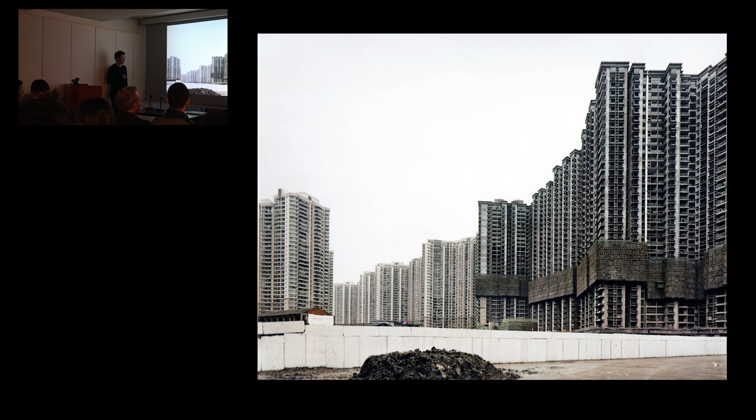So I just gave you a quick background about why I selected 'Seeking the Origin.' That's the origin I'm talking about.

The reason I'm saying this is because I don't believe one generic strategy can cover the whole situation. For us, each project is a unique issue that we have to face. We have to find a unique solution for each project, because our projects are actually scattered around the whole country almost.

But today, because of time limitations, I selected 3 projects which actually reflect, to some certain extent, our thinking about design practice. But they're actually in 3 kinds of locations.

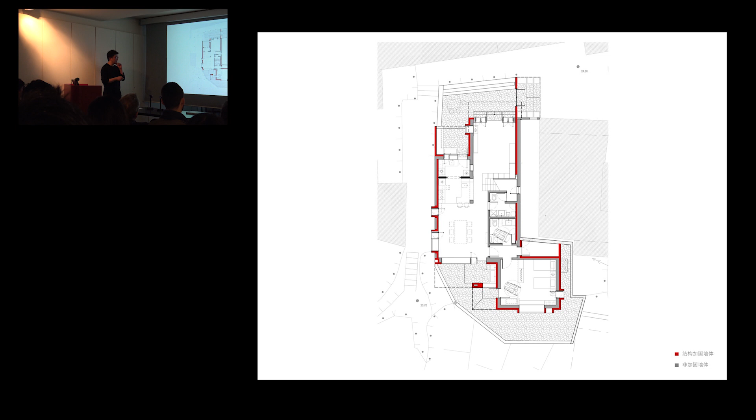We had been talking about different possibilities, but eventually the structural engineer gave me this kind of solution, which I like, because in addition to adding the third floor on top due to the new reinforcement of the structure, we also have some freedom to do more.

For example, because of the new layer of concrete, we can rearrange the layout. That's the existing layout—for me, the problem is that they have a bathroom right in between the living space and the ocean, this direction being the ocean, so it's blocking the light and also blocking the view.

Because of the new structure, we can relocate the bathroom to the corner, which is a back wall of the house shared with the neighbors—there was no much light anyway in that area. So we can open up the view to the East Ocean, and let more air flow into the space, and the light as well.

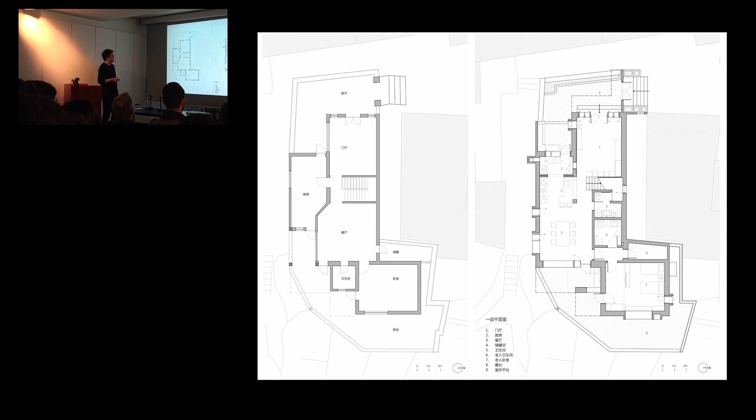Same thing we did for the second floor. This is the original location of the bathroom, and that's the new location of the bathroom. It's all along this back wall, which is to the north.

That's the new addition to the third floor, which I will explain later. They don't have any specific desire about the function of the third floor. They just need a space that can accommodate different kinds of life inside.

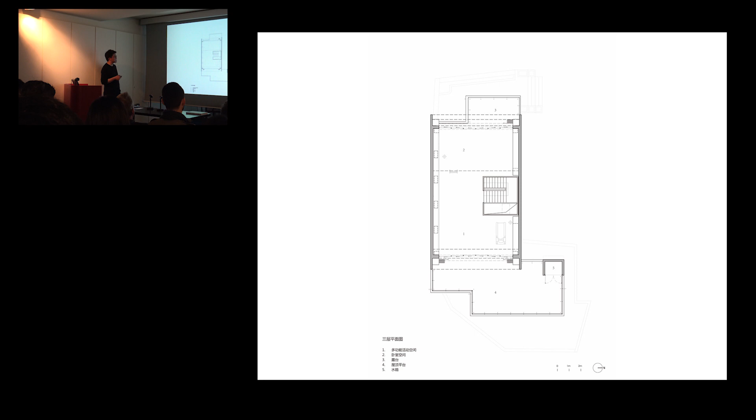As I said, the new structure gives us another freedom to remanipulate the location of the window. Because of the thickness of the combination of brick, this layer is the original brick, and this darker layer is the new concrete. So we have the thickness of the wall.

We actually project the new concrete structure outside the wall by 30 centimeters. The reason we do that is because the captain told me every summer they have hurricanes or typhoons, and when it rains, the water will just flow in all directions on the wall.

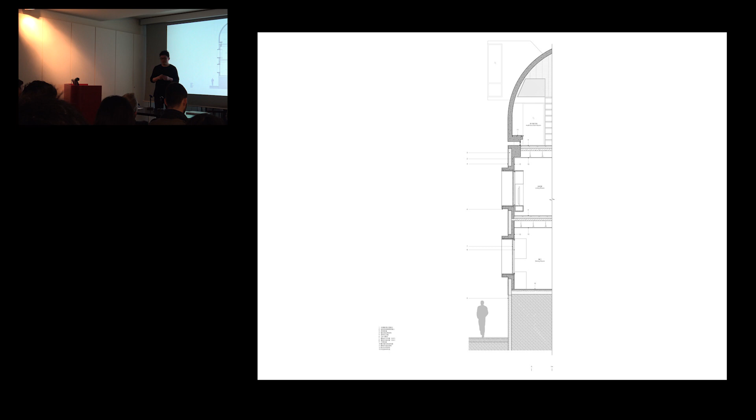That causes a very serious problem of window water leaking. So by projecting this window frame with concrete, we can avoid a large amount of water, lowering the risk of water leaking in the window system. Because of the thickness of the walls and the projection, the windows start becoming a space, not just a thin cut opening on the wall. We actually use the space to design some activity inside it, which I will explain later.

That's a sketch showing the window become a couch, for example. Or the window can extend into the space as a table. That's what we thought during the design process.

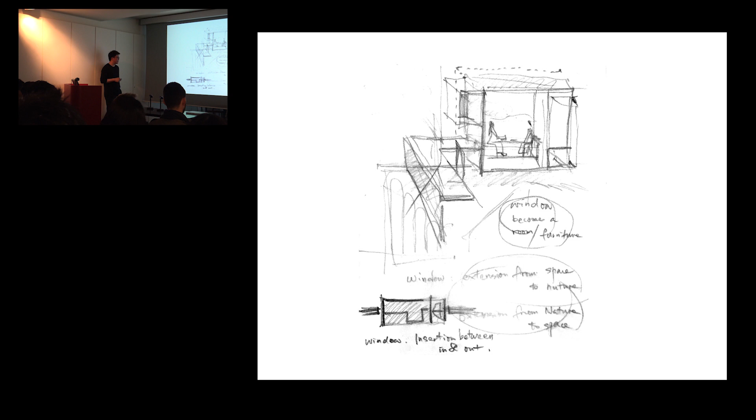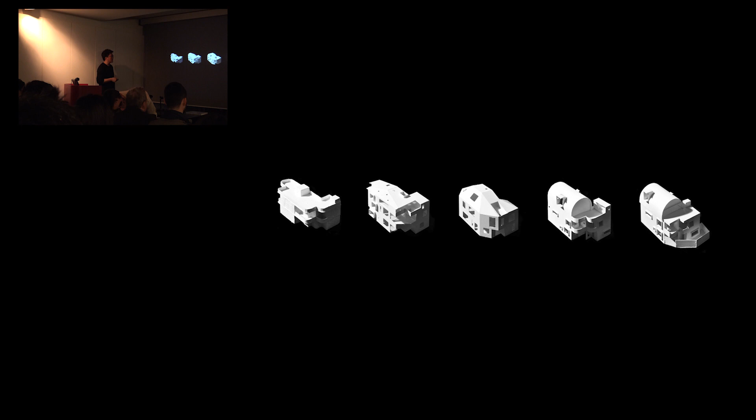Of course, we went through a comparison with different options. Now I'll talk about the third floor, the new addition. We chose the shape of an arch. We have many reasons to do that.

First of all, I think it's the most efficient way to let water run away from the roof, because before, the roof water leaking was pretty serious. If we do an arch, there will be no water staying on the roof, which reduces the risk of water leaking on the roof.

That's the first reason. The second reason is because we did this concrete new reinforcement along these two sides, so this arch seems like a kind of natural outcome. The wall actually grows up and converges at the top.

In addition, the arch has a very clear direction facing east and west. As I explained, on their rooftop, at the third floor level, they can enjoy the ocean view to the east and west. So the arch becomes a connector of these two ocean landscapes, transforming them into human perception.

There's another reason for the arch: their family is religious people, they believe in Christianity, so the arch has a little hidden indication of religion. Those are the reasons we chose the arch as the final design decision.

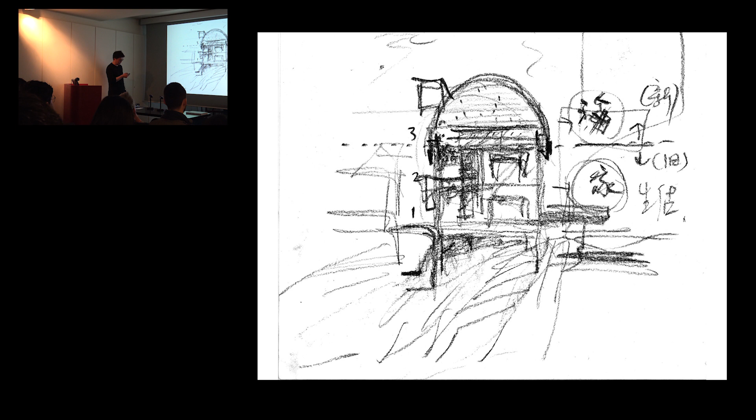That's all the sketches along the process. You can see we really cared about this east-west direction, which the arch connects together.

That's the axonometric drawing.

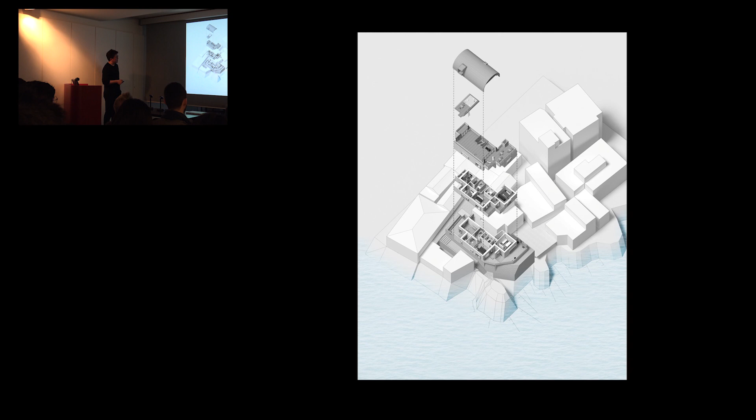Now the construction started. Because they have to put a new layer of concrete, they have to drill holes in the original brick, so these two kinds of structure can hold each other in a stronger way.

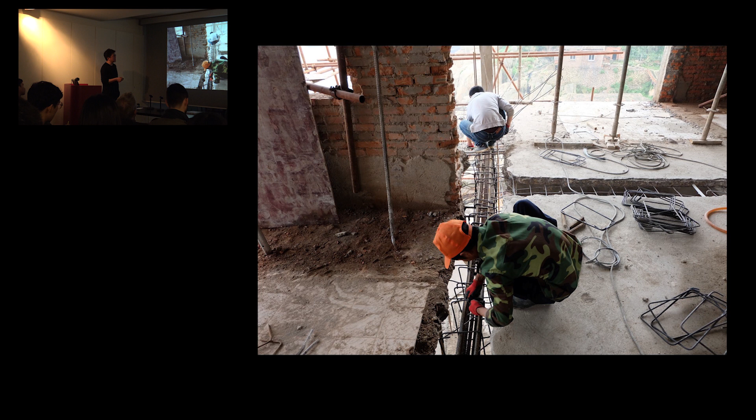They cut the existing slabs in order to put the new beams into it. That's just—it's almost like naked.

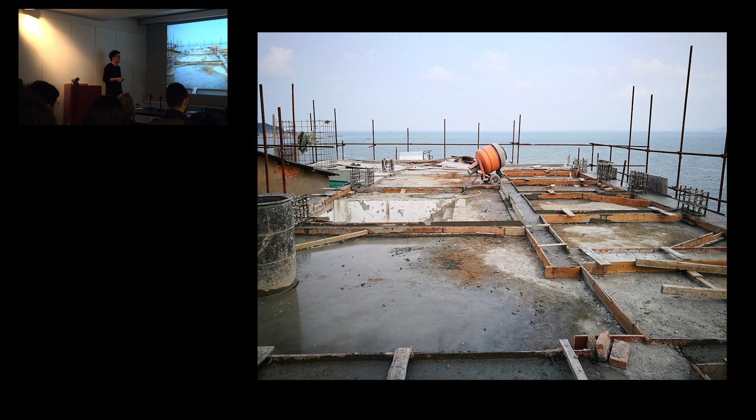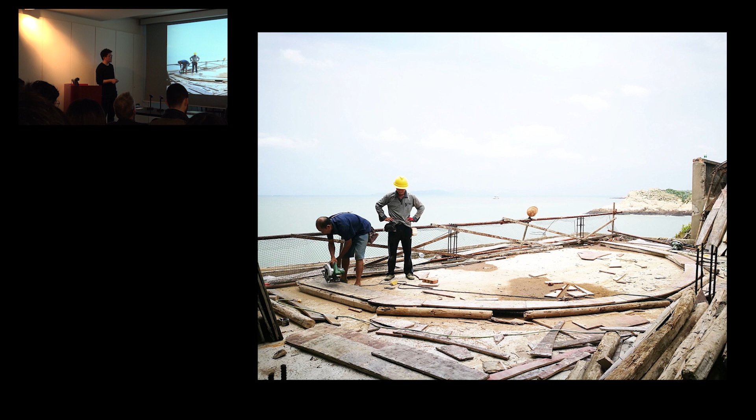That's the guy. That's the first piece erected. The shape starts showing.

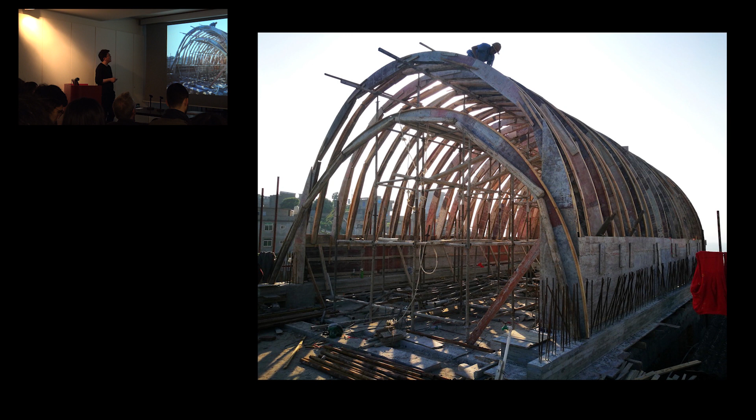Well, it's already beautiful by itself.

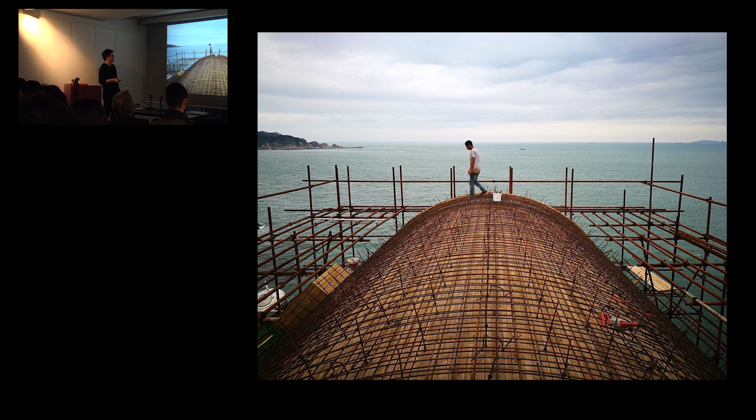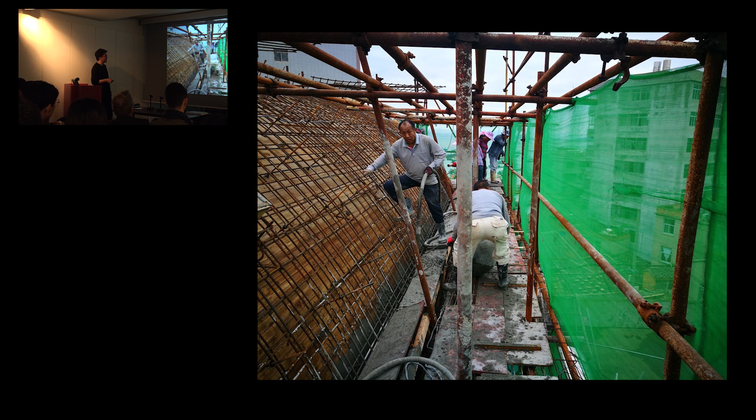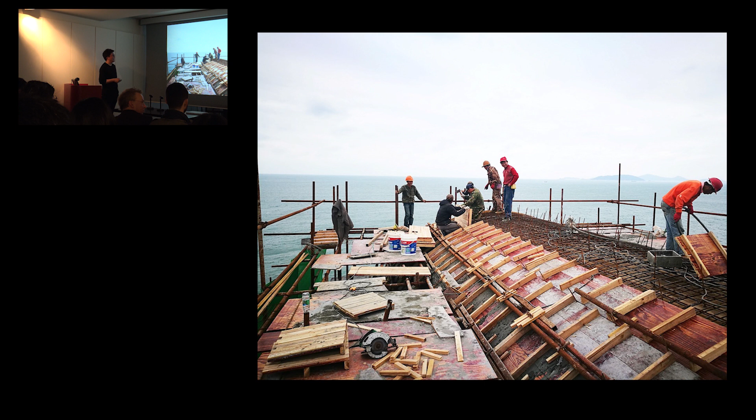That's when they start pouring the concrete. They put the rebars inside the formwork and start pouring the concrete, cast in place. This is really a handmade project because the valley, the alley of the village, is very narrow. No big machine can approach this building, so everything has to be carried by hand. That's when everything is almost finished.

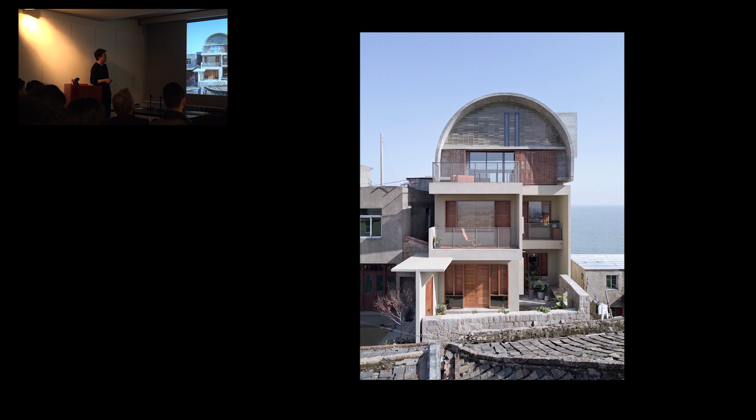That's the building. That's the final outcome of this entire project. The lower two floors were actually just painted with the waterproofing paint in a brownish color, but the top part is concrete.

That's the building in the twilight. At some parts, we actually leave the texture of the old bricks. We didn't really cover them out, we just paint a very thin layer so you can still feel that the old materials still exist there.

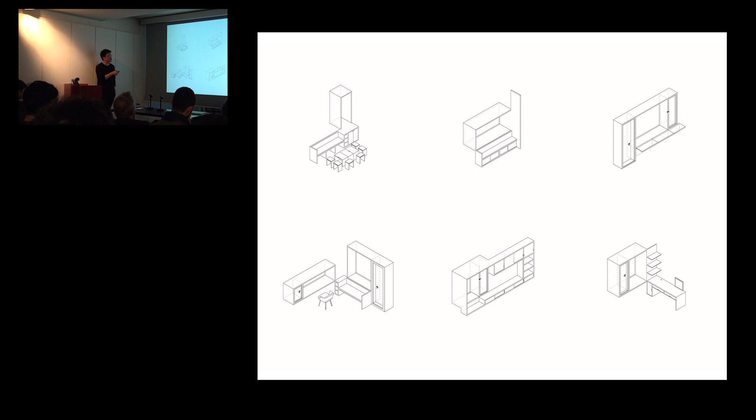Actually, I have a film that can tell you a more complete story. This is the window furniture I was talking about. Each window becomes a furniture piece between the inside space and the outside landscape. So you can see that's the window arrangement.

The operable window is always on the inside of the frame because we want this frame to protect against water from the rain. But the fixed window is on the outside of the window frame to make more interior space. And that's one example of the window, so you can just open it like that.

And that's the window becoming a living room, a television shelf. The window becomes an extension from outside to inside, at the same time from inside to outside. People can actually sit here reading a book. That's a window becoming a couch, a table. That's the daughter's new bedroom.

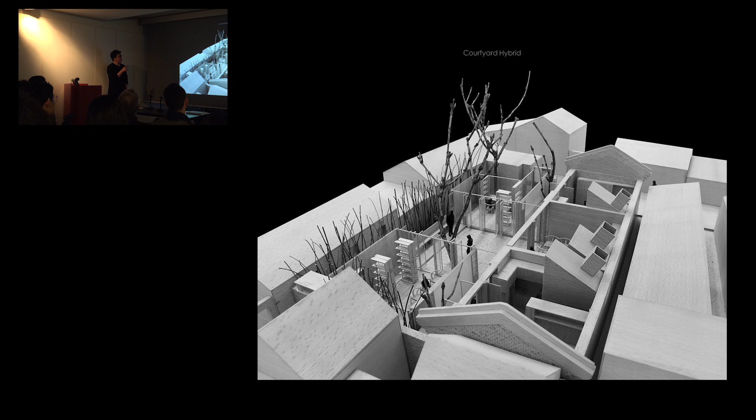Okay, the second project, I have to be faster. This is what we call the courtyard hybrid. It's actually in Beijing Old Town, in the Baitasi area, which is inside the second ring, the center of the city.

You see, this is all courtyard, which is actually the traditional living space of the Beijing people, regular people. This is a map from Qianlong, Qing Dynasty, about almost 300 years ago. You can clearly see the courtyard fabric. Each family has a yard. It's very clear.

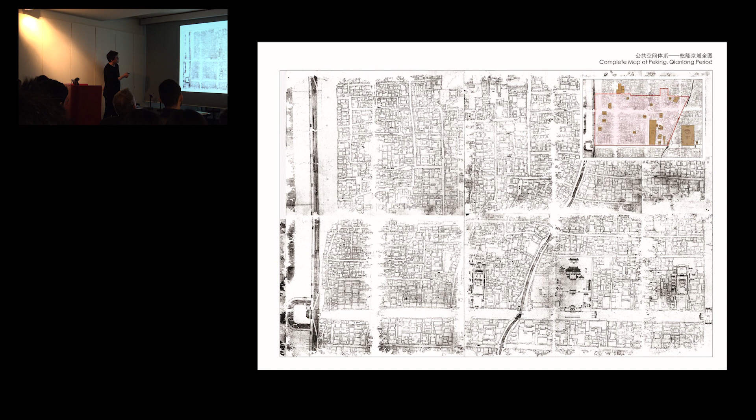But after the 1950s, because more and more people squeezed inside the city, before, one courtyard belonged to one family in most cases. But in the recent 30 or 40 years, most courtyards are shared by multiple families because of the lack of living space.

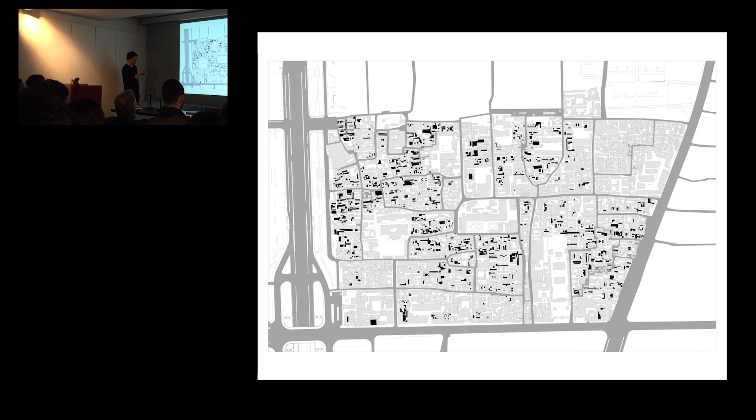The black part is when so many people live in such an insufficient space, they start building their own kitchen, storage room, or even small bedrooms. So the entire urban fabric changed. You won't be able to perceive the clear courtyard fabric as in the last map. All the yards are filled by this new addition of family construction.

The owner, the client of this project, is actually a government background company. What they're trying to do is revitalize this old district in Beijing, because along with this, the courtyard's quality of space is going down. The rich people are moving out because they have money to buy new apartments or move to better areas. So the whole district became like a rental residential compound for lower income people, and they want to bring some new energy into the district.

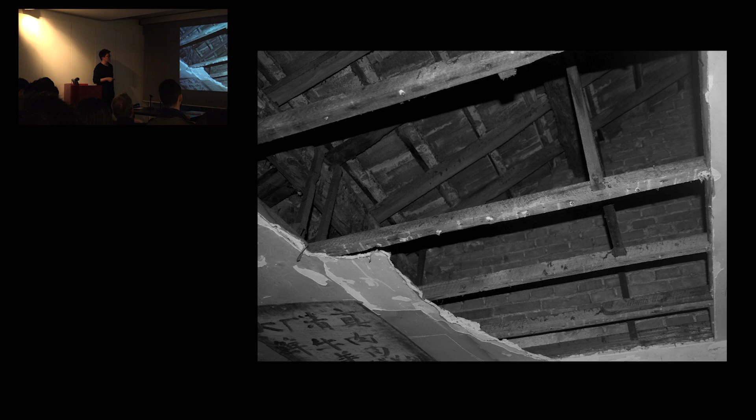The current structure is almost unsafe. And that's the space inside the yard. Comparing with the image I showed you of the original courtyard in Beijing, this has a very big difference in terms of spatial quality. You can imagine living in this narrow space with different families in one yard. So that's even more sad, I think.

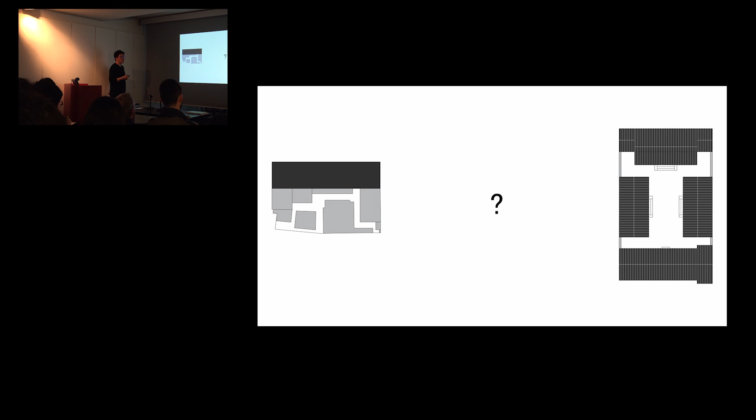So the topic of the design is, between this current condition and the old Beijing courtyard, what we have to do for this renovation of the project. These are some keywords from the beginning of the design.

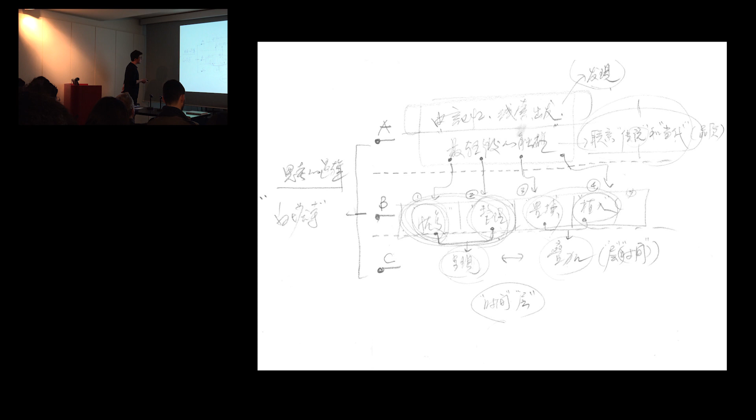Recovering, reorganizing, inserting layers of time, and so on and so forth. That's the keywords that before the design we have to remind ourselves of what we're trying to do in this small space.

In the very beginning, the program is a public library lounge coffee bar. That's the very initial program that the client gave us. So we designed this, keeping the original footprint of the main building, and remanipulated all these different volumes, clusters of small space, to make it a functional space for a library or lounge. This is the first round of the concept.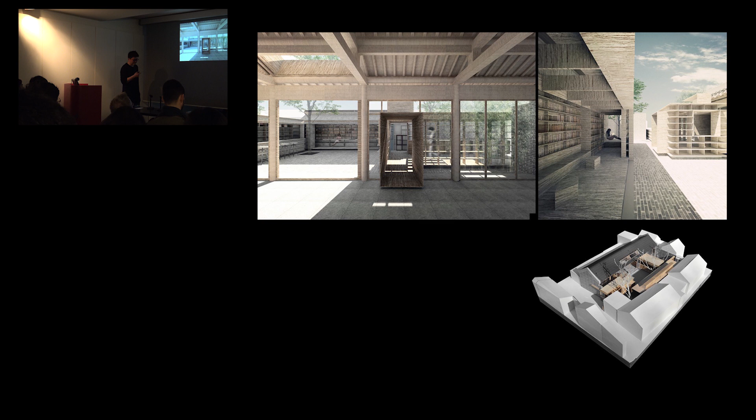But after we had done this, the client told me they changed their mind. They said we don't have enough capability to operate this lounge because that needs professional skill, so we need some space to get quick money. They wanted to add 2 residential studios inside this small yard. That's actually a safer operation because they just rent the space out and get the money back. I said, okay, let's try that.

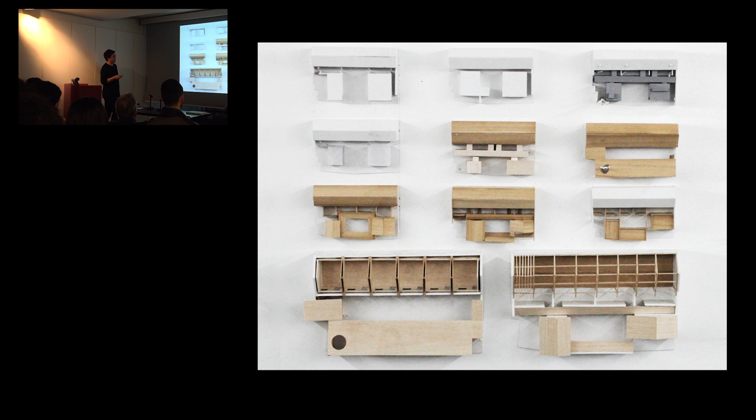But at the same time, the good thing about the client is they still want to keep the yard public. So as you can see from the diagram, these are 2 studios which could be rented out, and in the middle we leave space for a public cafe. We have a yard which belongs to everybody, sharing the yard.

I think what we're trying to do is still keep the concept of using the yard to organize the whole space. So you can see the studio has a small yard, they have their own privacy, but the public yard is shared with everybody.

And this is like a multiple pavilion space. It could be rented as an office, or maybe it could be some event space later on. That's what the client told me.

And I think there's an interesting part of this entire courtyard: this is one hutong, and that's another hutong on this side. So we're trying to keep a connection inside the yard to let people freely penetrate from one side of the hutong to another. I think that's something I personally feel very interested about in this project.

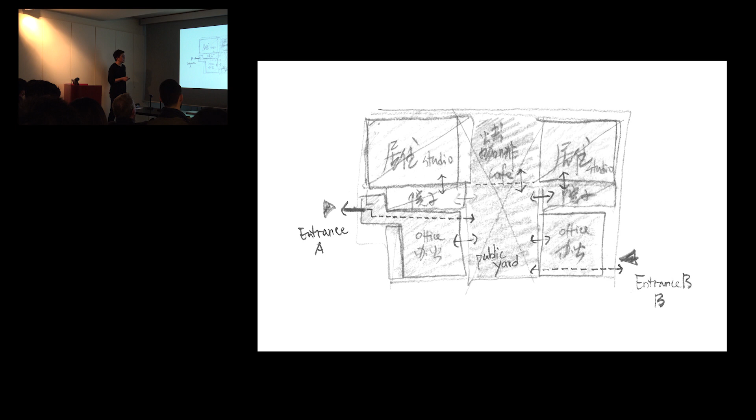So we developed this project. You see 2 studios with small bedrooms and kitchens and their own yard. Of course, this wall is translucent to keep the privacy of the studio, and they have a gate outside their room. Then one public cafe with 2 small spaces on both sides. And this is the connection of the 2 hutongs.

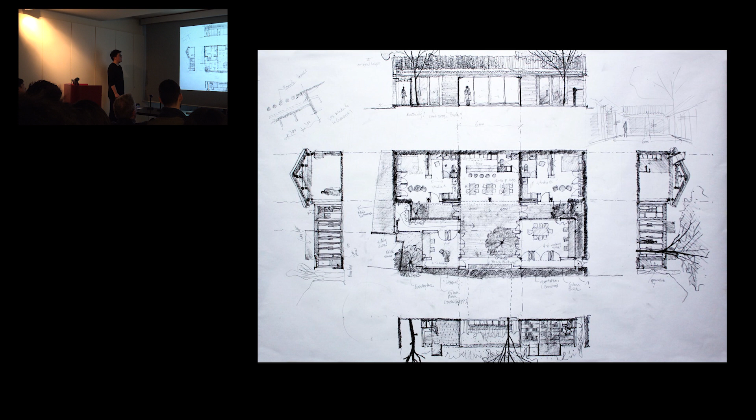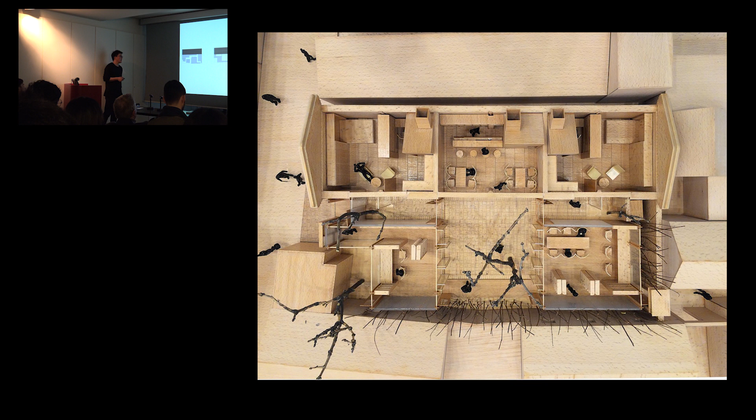And we use some large-scale models to test this kind of arrangement. So what we do is reorganize all these clusters of small boxes to give privacy to each function. At the same time, we keep this original shape of the courtyard as a very clean shape to try to make a peaceful atmosphere inside the yard, which you can see later on in the picture.

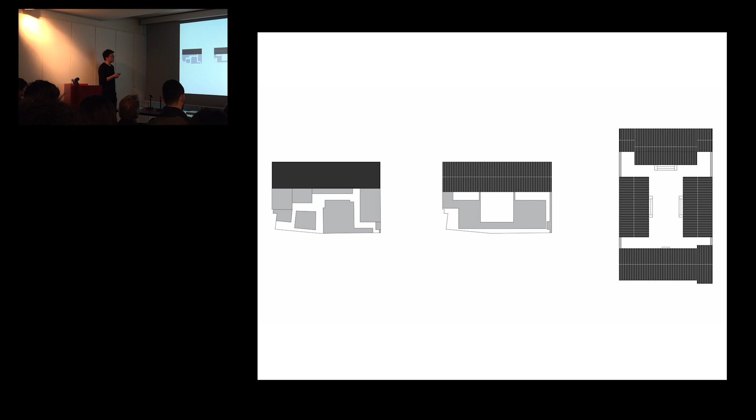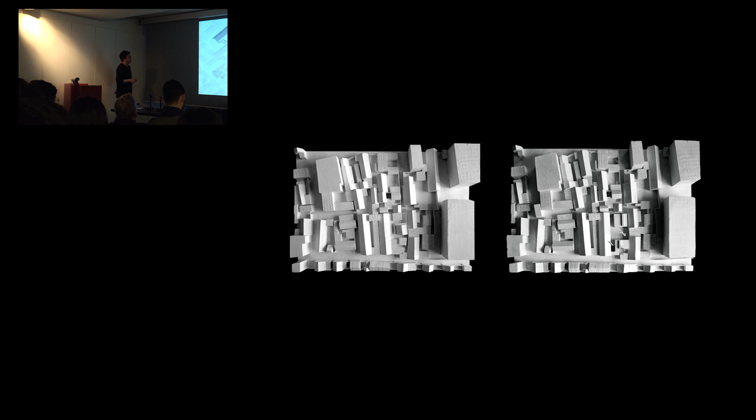So the urban texture is not very much disturbed. This is the old and that's the new. We just reorganize all these small boxes. That's a diagram showing the layers of this concept.

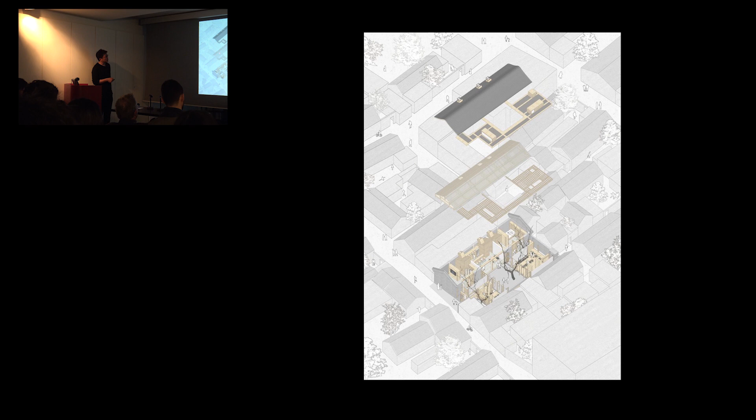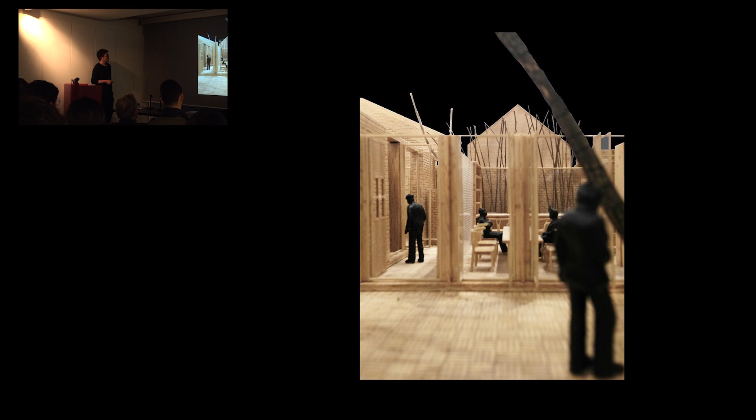That's the space layout, and that's the structure. We have 2 kinds of structures, I will explain later, and that's the roof system. That's the model showing the different kinds of activities and the spatial quality. The scale of the model is large, so we can really see the space, try to imagine what it will look like after construction.

And that's the studio actually for the rental. So we went to the construction document phase. And then one day a client called me, they changed their mind again. They said, well, we calculated, even though we rent that studio out, it's not a big money at all.

So let's get rid of the studios. Let's make it an entirely public space for events, exhibitions, meetings, conferences, whatsoever, to attract more people into this zone and have more interaction between outsiders and local people, which I think, okay, it's okay — architect is always magic, right? So we got rid of these 2 studios to make a more generic big space for multiple functions. But the good thing is everything else is kept.

So you see these 2 pavilions, small yards, big yards. We have a long bench over here, and we leave a small gap with the neighbors to let air and light penetrate into the space. And this hutong and that hutong are connected by the path here.

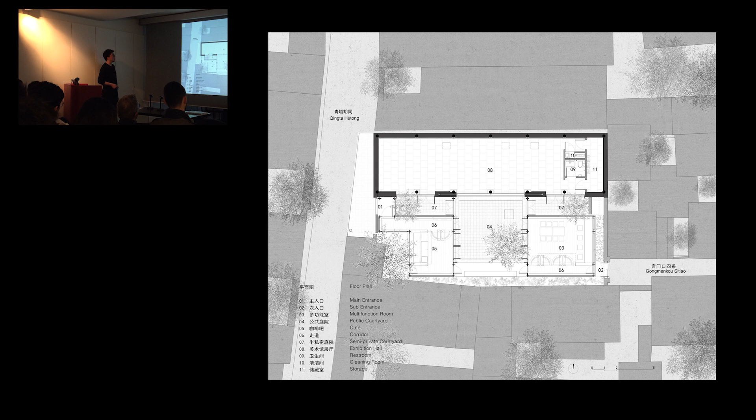And that's the structure model that we did in the process. Basically it's 2 kinds of structure systems. The north building, which is the main building of this courtyard, we have to keep the original structure. That's the law in Beijing.

But for the new addition, we selected prefabricated laminated bamboo as the main structure material. The good thing about this is it can actually be pre-made before the construction, so it can shorten the construction process, partially done in the factory. This is almost like a juxtaposition of these 2 kinds of systems.

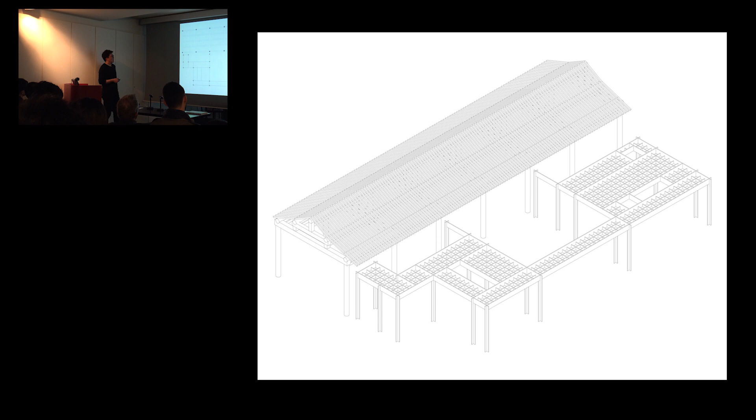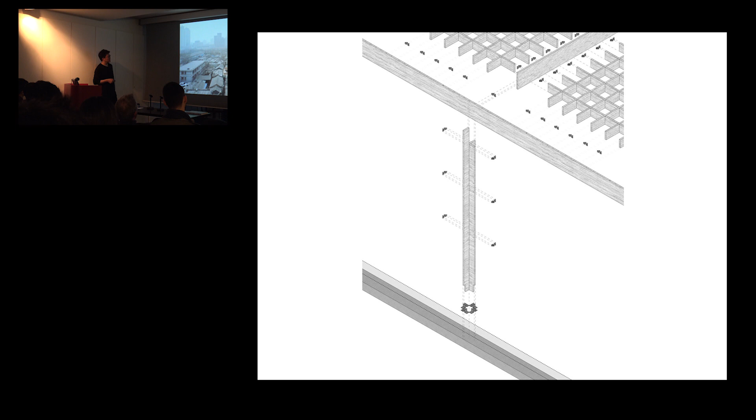That's the relationship in plan between this new structure and the old. That's some details of how we hold this structure together. This is the new addition, the laminated bamboo. Because it always comes as a plate, we had to find the detail to make it like a column, held periodically by these holders. That's after construction.

Just like we add a piece of wood in the yard. Well, this is typical smog weather in Beijing. We almost half of the year always have that air quality. And that's the main yard after construction.

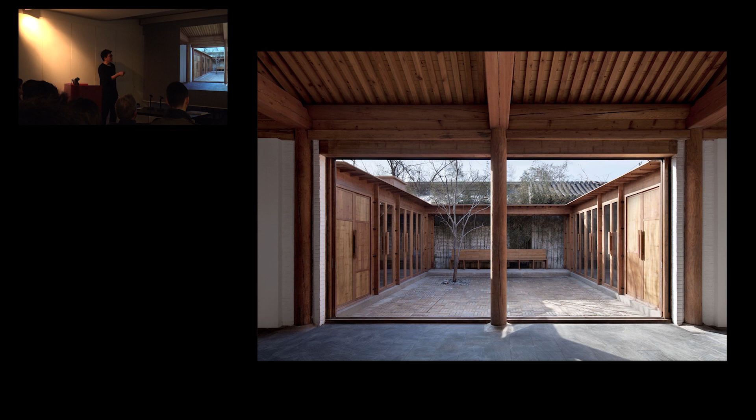So you see this is the old structure, like a traditional structure, and that's the new addition. Different angles of the space. All the surfaces are flexible because we try to think: when the weather allows, when all the surfaces are open, the space becomes more fluent. That's some tectonic details about how this bamboo plate is held together by these small clip holders.

This is a big sliding door. You can slide it all open when the weather allows. That's the main building inside the main building.

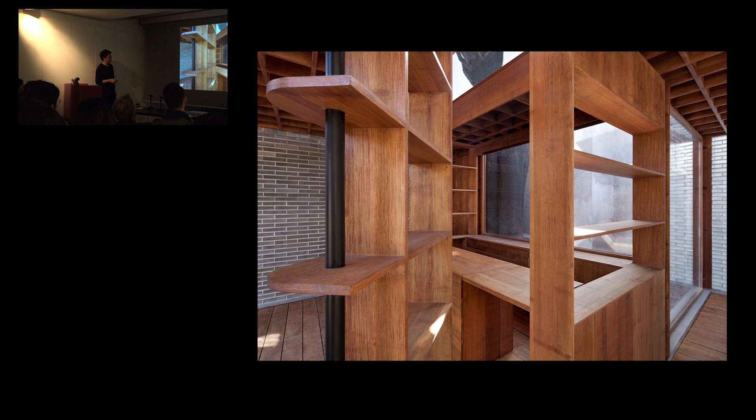Because the space is so tiny, we had to design a series of rotatable furniture to give more flexibility of use. That's one of it. So this rotates to a closed condition. That's another rotatable shelf. That's the bench.

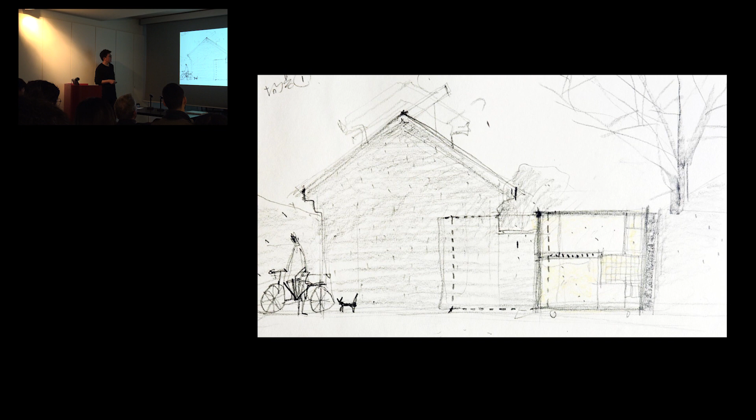Small corridor. That's the main yard and the smaller yard here. And from outside, it's like this. This is the traditional way this kind of Hutong building looks. We give a little touch to this entrance to make it special, but it works well together because the size of the glass brick matches. This is a sliding door at the entrance, making this like a small vestibule.

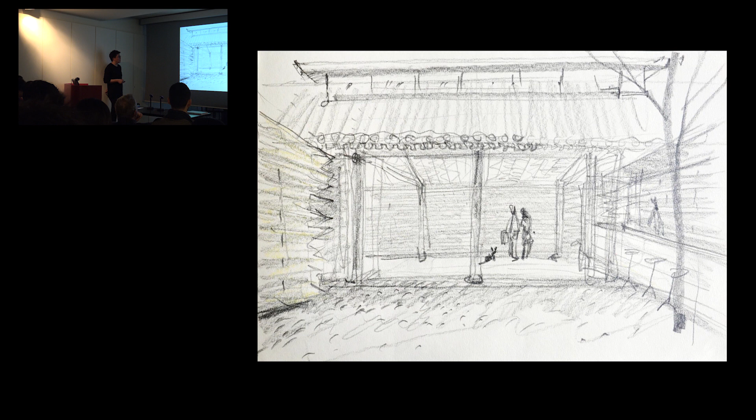We selected this special material, glass brick, because on some walls we had to keep the privacy of the space, so this translucent material helps achieve that goal. But in this other direction, it's always transparent glass. We want people to see through different layers of the space to feel that this small yard has a bigger feeling. So it's translucent in that direction, but transparent in this direction.

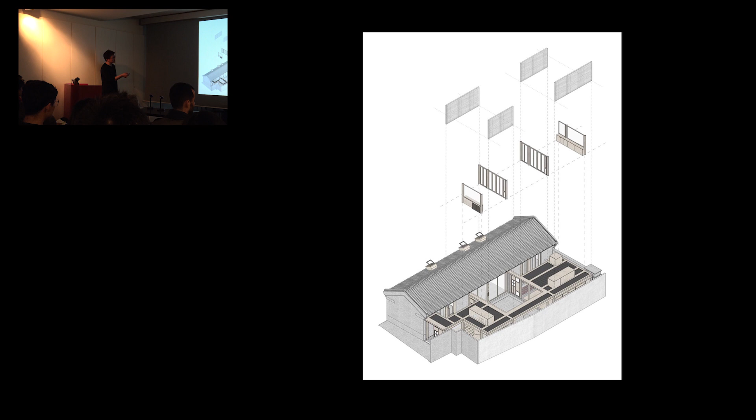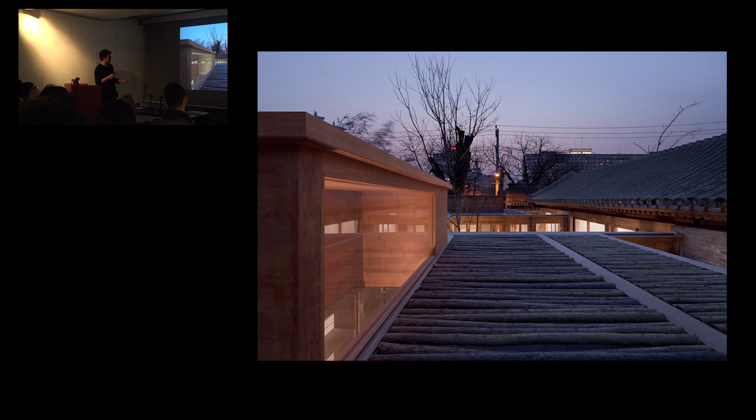That's an operable sky window for ventilation, and we have some skylights too. Because the space is small, we try to make some openings on top for people to look out to the tree as the light comes down. So at night, the light will actually come from inside to outside. This is the existing tree that we kept.

However, two weeks before I came here, the client called me again. For me, this is almost like a torturing process I've experienced in recent years. She said because they think this is a good completion in terms of the quality of the space, a lot of people visit it, and some tell them they want to pay a high price to rent the space for private use. The client told me they're thinking about that. So sometimes I feel an architect is so vulnerable - that happens a lot in China, so if you guys try to practice in China, you have to be careful of that.

Okay, so the good thing is at least they had one public exhibition inside the space, during the Beijing Design Week. That's when the yard hosted the exhibition - they made this temporary exhibition design inside the space.

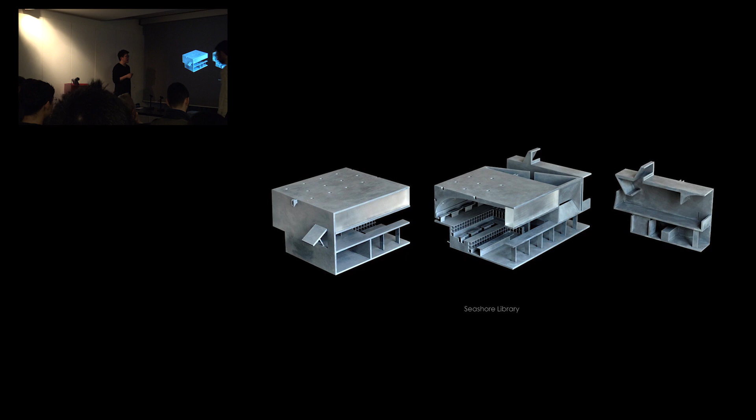So the water level is actually pretty stable because of the Bohai Bay. They don't have typhoon or hurricane in this area, so the ocean is more calm in terms of the climate character.

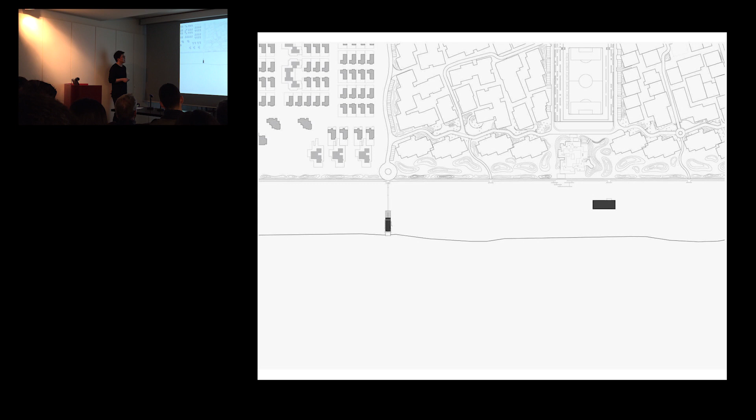But 3 years ago, the first time I went to the site, it was really primitive. There's almost no building at all. So you feel you stand in front of the ocean, you almost feel a little unsafe because you see this kind of gigantic nature in front of you. And that really affected us, the feeling of that first day.

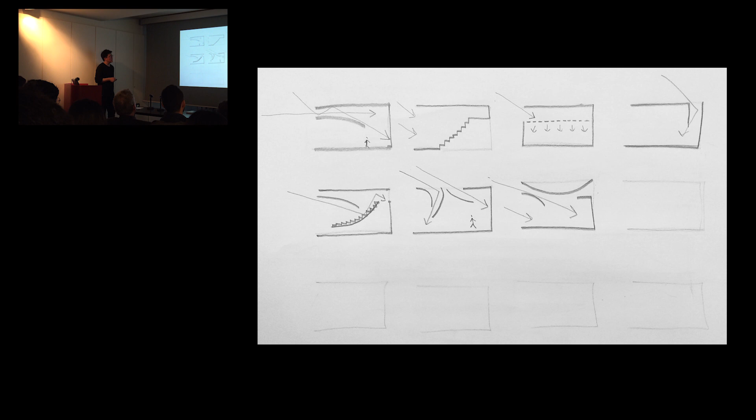So we start the design process with section, to study how the light and wind come into the space. This is an important sketch I'd like to explain a little more. The ocean is to this direction, so obviously the space has a very clear direction facing the ocean. But this is to the east in terms of orientation.

As you know, the library wants to evenly distribute light most of the day. Because it faces east, when the sun is at like 9 or 10 o'clock, it will go around the building. So most of the light will be blocked by the concrete wall on the south facade and the west facade.

The entire space is stepping because we want people not to block each other when they look out to the ocean. And this curve actually reinforces this direction to the ocean. We know later on there will be residential buildings to this side, so we make this elevation more solid to isolate people.

The curve actually goes down to the floor to leave a horizontal opening underneath the bench—this is a long bench—to give cross ventilation into the space. This entire building has no air conditioning at all, so it's all passive. We have to think about natural ways to ventilate and cool it down, because the building is used in the summertime for the most part.

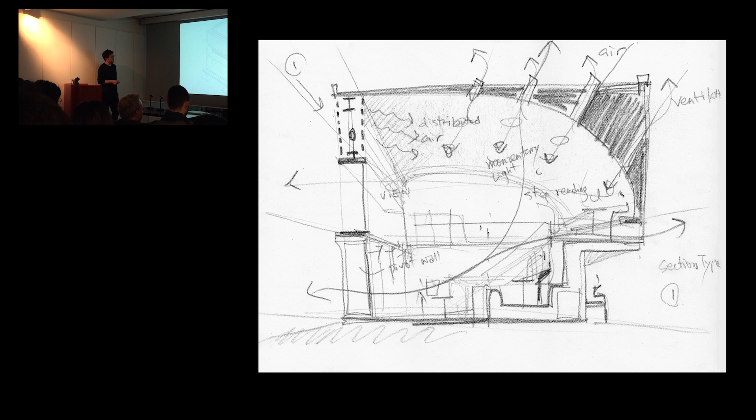That's the east facade section. We want to give a wide open view at this level, make it more transparent, so we had to eliminate all the structural members along this surface. We use a truss to carry the load of the roof, but we don't want to expose this kind of industrial member too much, so we use a glass brick on both layers to cover the truss.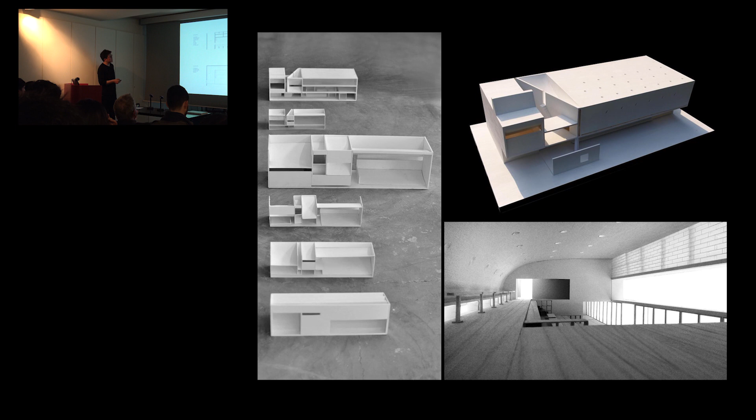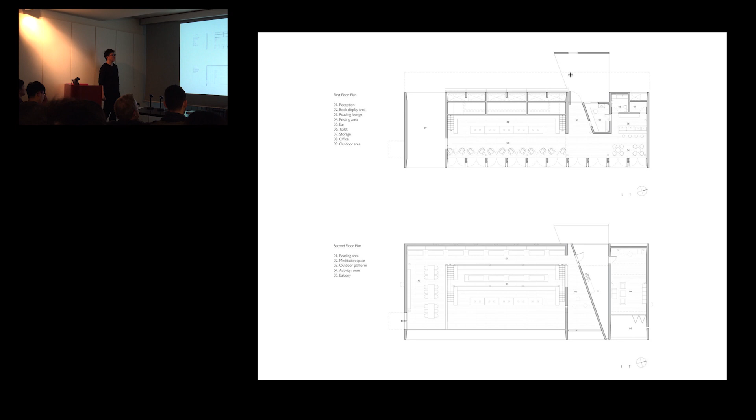Very simple functions—our big reading space, that's the second floor actually, stepping. This is a small meditation room right next to it, and this is an outdoor deck separating the main space from an activity room, because there's always an event with noise happening in that space, so the deck will block the noise. That's the entrance on the first floor, a small bathroom, office, and supplementary programs like a bar and pantry.

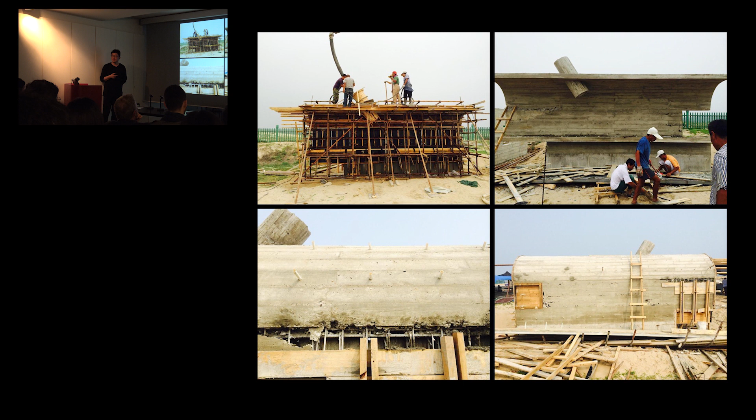So construction. This is when they do the mock-up for the first time. As you can see, that's the quality of when they're doing the concrete. We work with a very local team. They never had the experience to do this exposed concrete. So when they have this first mock-up wall done, the client called me.

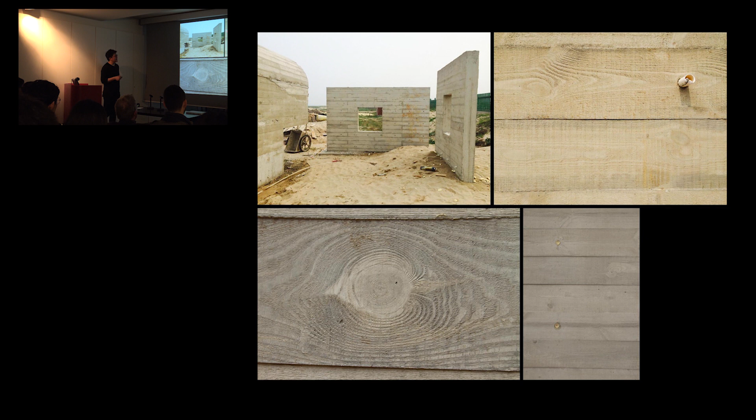He said, Gong, maybe we have to change the material into paint. I said, just ask them to do the second piece. So they do the second piece, third piece. The third piece is perfect, even better than the main building actually, because it's a smaller size, easy to control.

We use the wood material as the formwork, so the concrete are impressed by this wood texture, leaving this kind of warmer texture that relates to our human being, comparing with flat concrete.

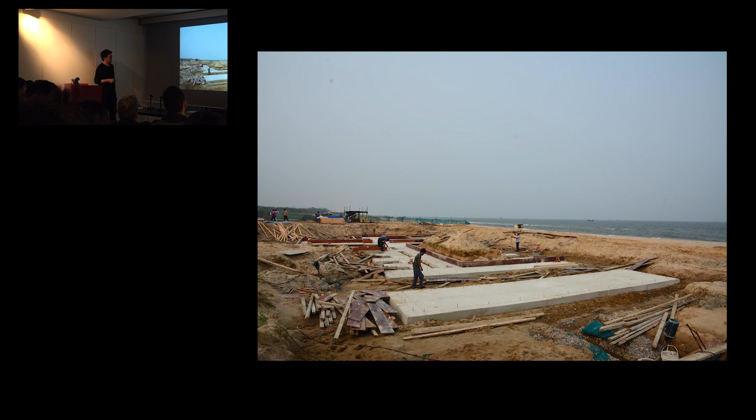So they start building the foundation, setting up the rebars. Because the wood is alive, it's kind of a material with life. It could shrink or expand because of different temperature and humidity. So they have to always brush water on top of it to make it more stable. They even have to set up sunshade in the construction process to avoid the wood becoming too warm, too hot.

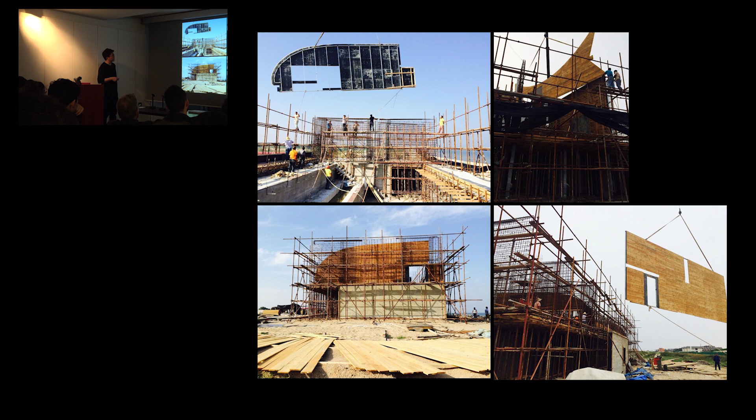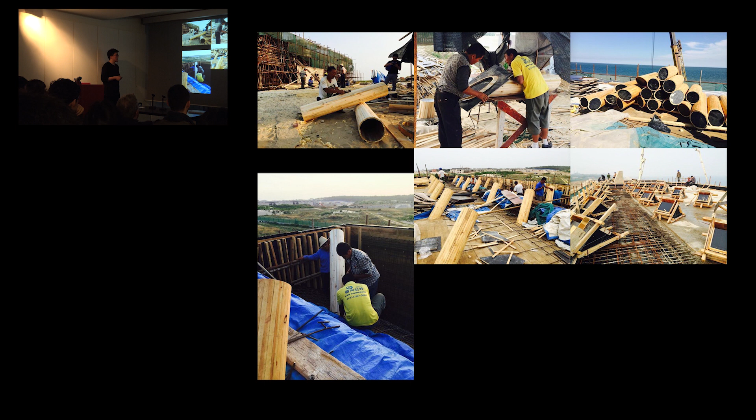That's when they set up all the formwork in the process. They're doing the stud for the curved roof on the ground, putting it to the space, and then putting the formwork. This is the moment right before they cast the concrete. This is when they start making these ventilation tunnels on the roof, after the concrete was casted.

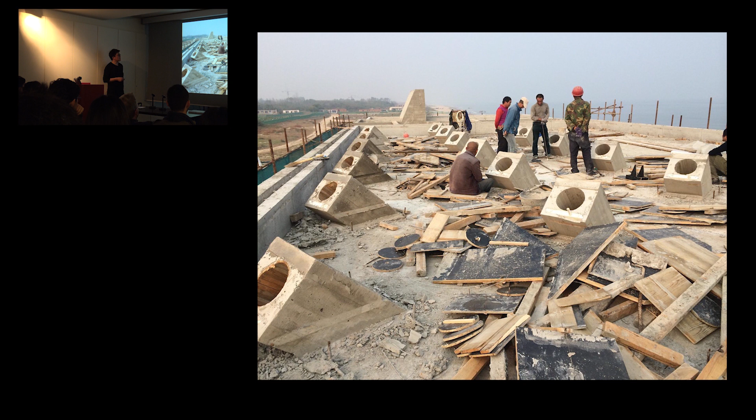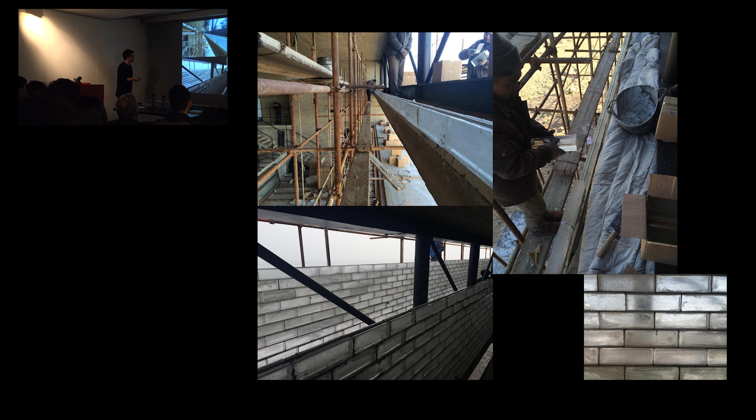You see this C shape. Because we have to leave the space to hide a steel bar inside. This steel bar helps the brick wall be stronger to resist the lateral force, because along the seashore there's always a big wind. This steel bar is connected to the main truss by small details, every other certain distance. So after construction, these two layers of wall work together with the main structure as a combination structure system to resist the lateral force.

Important guy, the leader of the construction team. I'm very much grateful to this guy because even though he has no experience doing this kind of high quality building, he's a very responsive person. So I'm really very thankful to him.

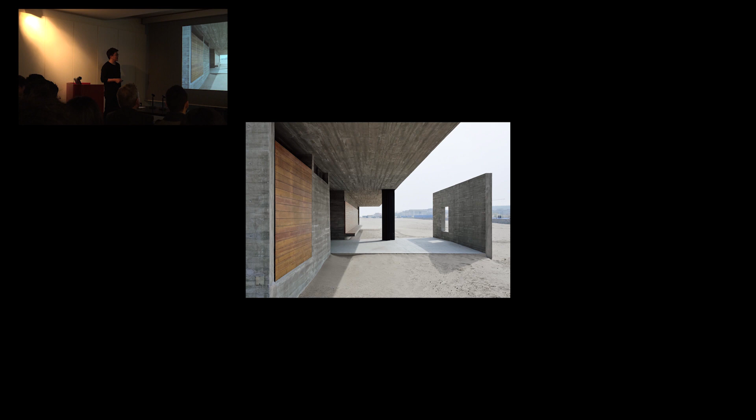I'll just go through it very fast because the movie already tells the story. That's when, in nice weather, the first floor pivot doors are all open — it becomes more like a pavilion rather than a building.

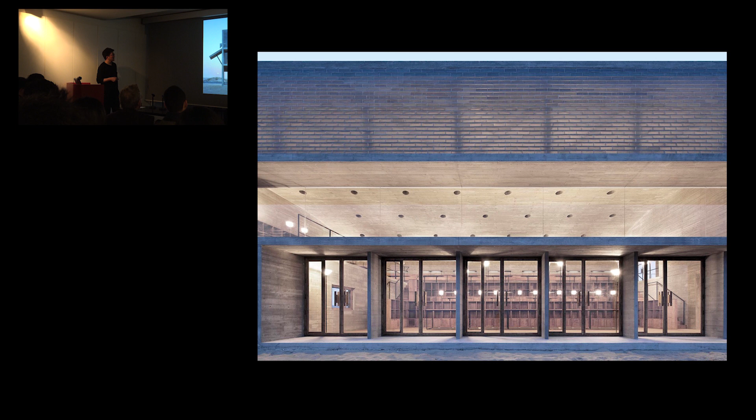This is when the light comes from inside. That's the entrance. Small window. The main space. And that's the shadow I'm talking about.

It's in the afternoon time when the light penetrates into the space, and you really can feel it's moving. Not literally moving, but after 10 minutes the position is changing because the tunnel has a distance — it's very sensitive to the sun's movement. Different angles.